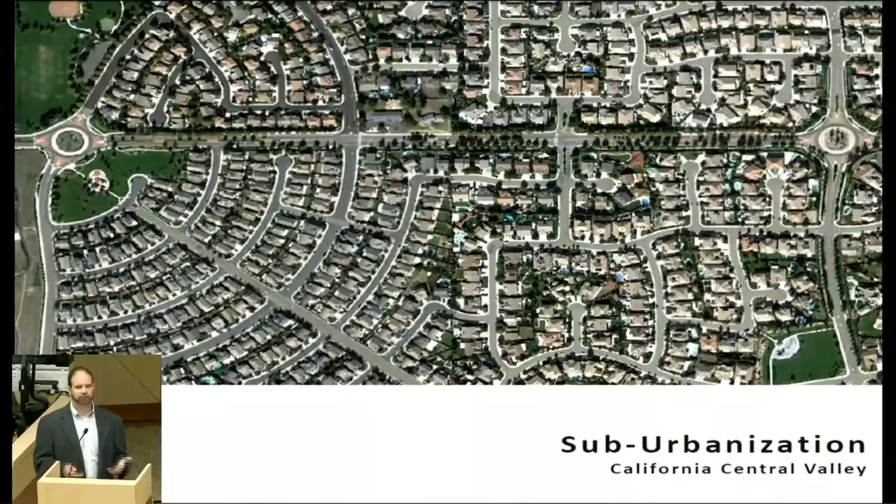A couple more examples, and it's not just here in the U.S. This is the condition everywhere across the world. The good news is that there's tons of different habitat out there. Let me back up and say that there's tons of different habitats, and the issue is that we are altering it. It doesn't matter what type of landscape it is, and we're replacing it with this condition.

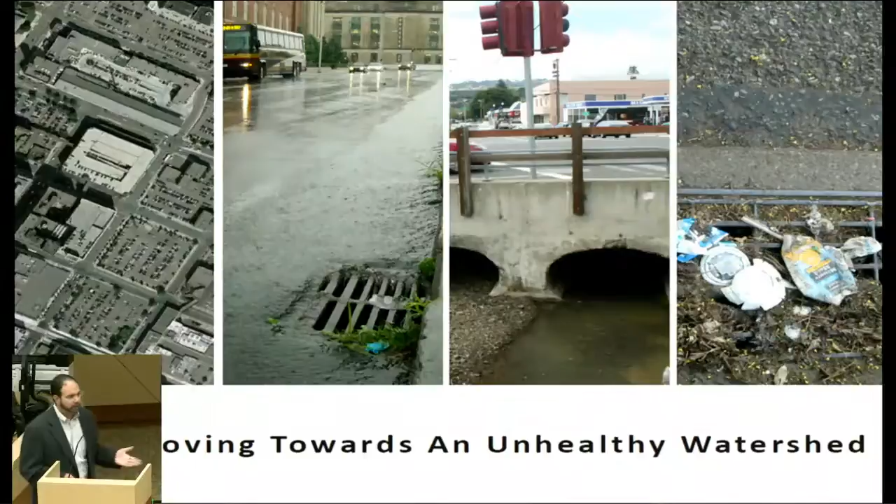The equation's pretty simple. Starting from the left to the right, we've got high areas of impervious area. When it does rain, none of that water can get into the ground. It's quickly conveyed into an underground pipe conveyance system, and it's kind of taken out of sight, out of mind. And of course, the trash and the sediment and the pollution load is taken with it.

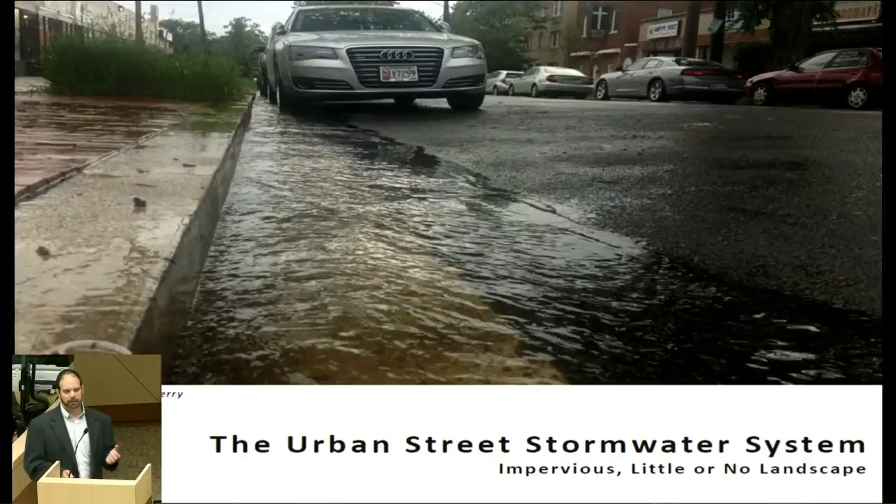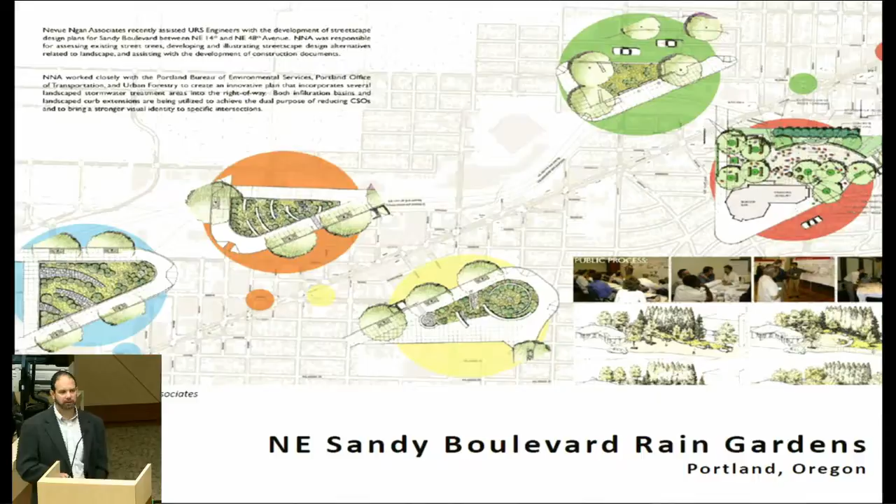This is another example of a different technology using rain gardens. This is Sandy Boulevard in Portland, Oregon, and for any of you that have ever been to Portland and driven or walked down Sandy Boulevard, it's a wide arterial street that cuts through the city grid.

What happens is that in many cases, as it's cutting through the grid, there's triangle spaces, these kind of leftover triangle spaces that were often just utilized as empty no man's land asphalt spaces. And they were too small to actually put a building on.

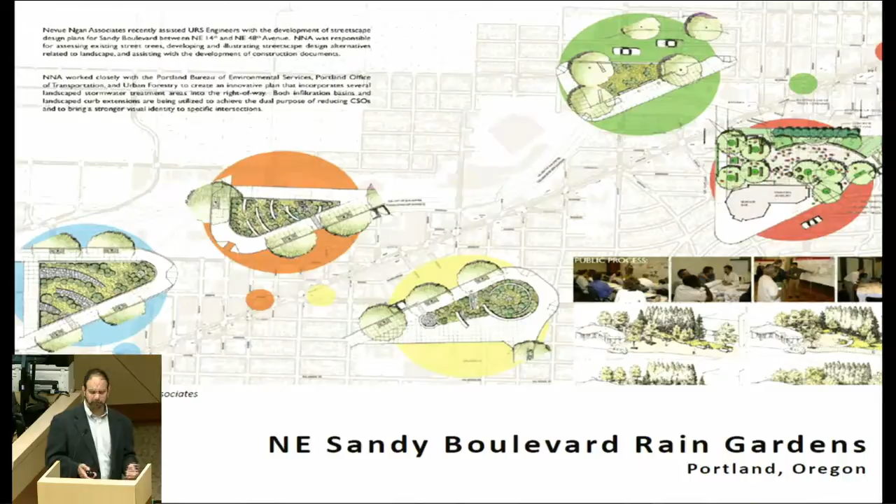So the condition pretty much looked like this, where you've got, again, this is Sandy Boulevard cutting through the grid, and this is a side street. These triangle spaces are a very inefficient use of space. It was very difficult for a pedestrian to actually get across these triangle spaces.

So we were asked to provide some examples as to how to fix this situation. We couldn't do it for the entire context of the street, but we did it at 5 locations where we converted some of these triangle spaces of asphalt into rain gardens.

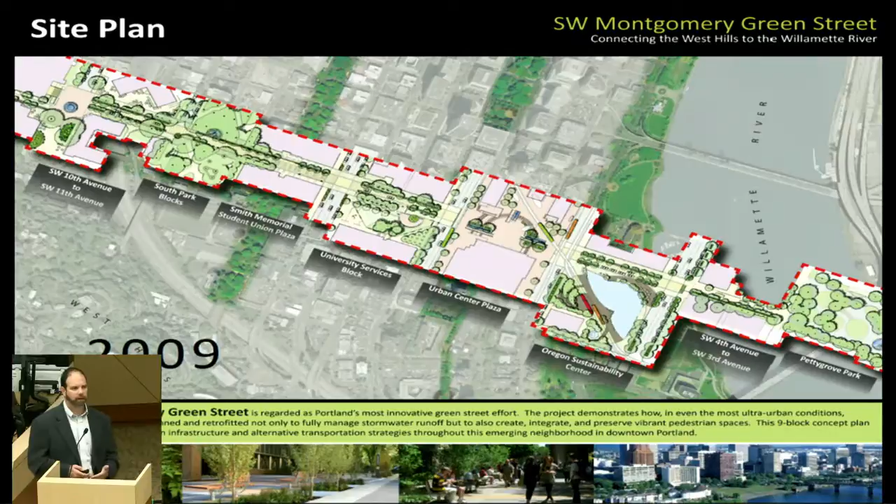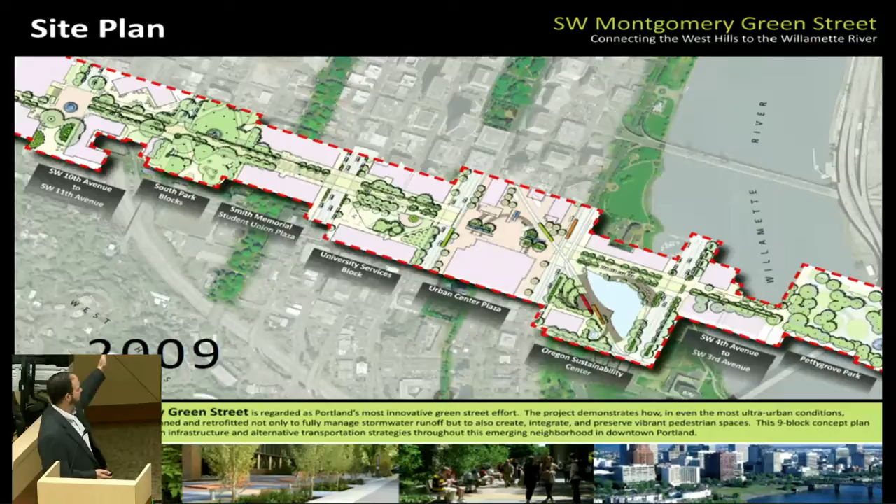This is in downtown Portland. This was a plan that I developed with many others in 2009 for Southwest Montgomery Green Street, very near Southwest 12th Avenue. The charge on this project was how green of a street we could really make Southwest Montgomery, in terms of not just stormwater, but how we could make it the best pedestrian space and the best bicycle space possible. It looked at about 9 blocks from the West Hills all the way down to the river, with specific focus through Portland State University.

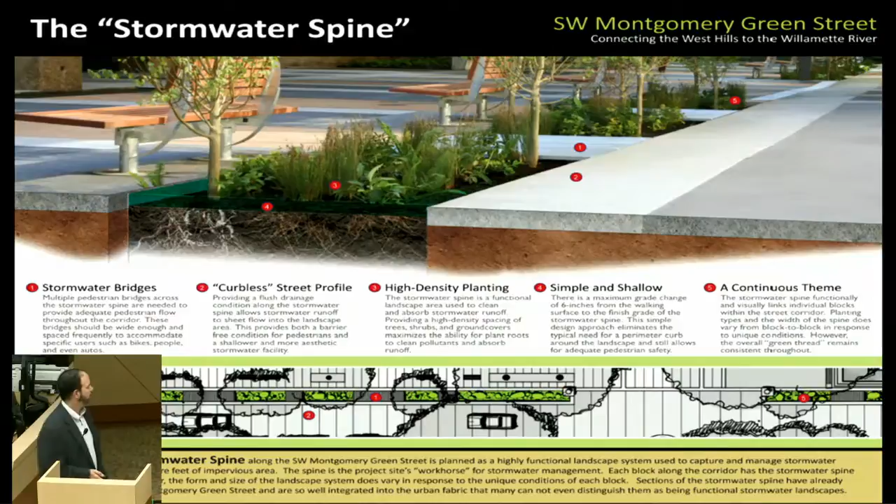What we introduced was something called a stormwater spine, a relatively continuous 5-foot wide planter that would go from street block to street block, with water just moving down the spine. Its design would change a little bit with the character of the street, but for the most part, it was one long, continuous green space.

Not just looking at the stormwater piece, but looking at how we can make this street better for all modes of transportation, whether it be light rail, increasing sidewalks from 12 feet wide to 17 feet wide to allow for better pedestrian space, many more bike racks, and more places to actually sit. And one of the blocks has its on-street parking all dedicated towards electrical vehicle charging stations.

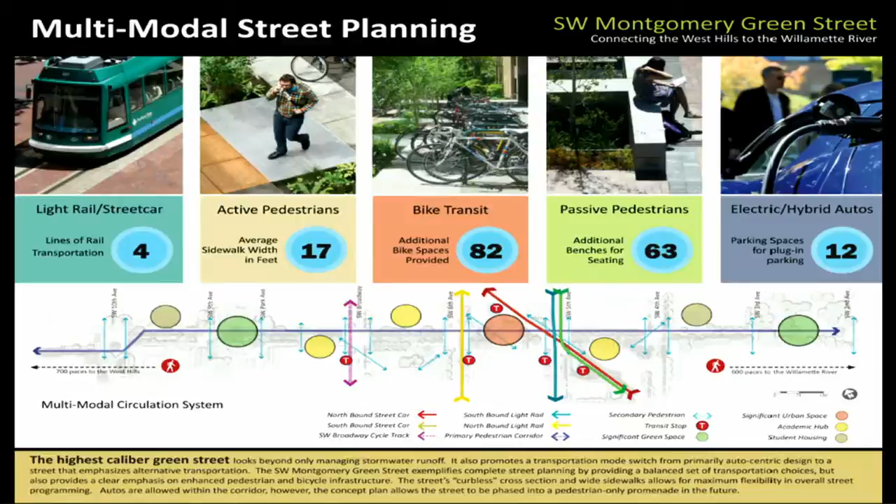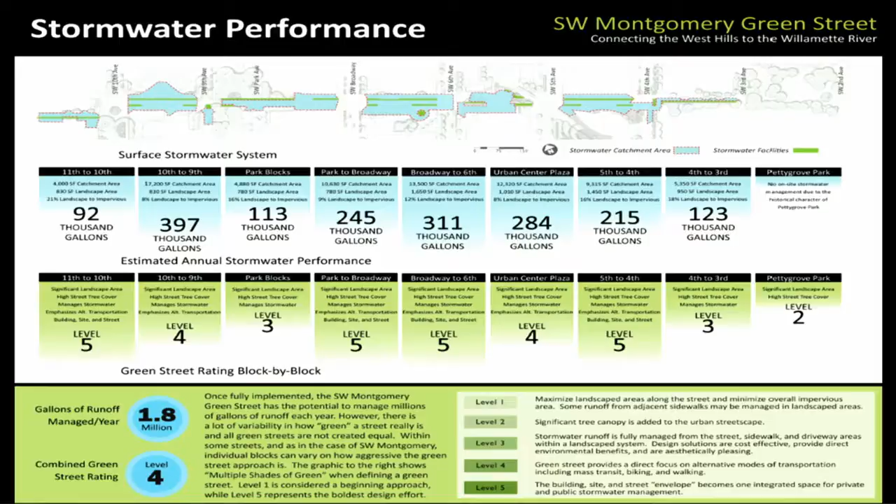This is still just in concept form. We did build 2 blocks out of this plan, but for the most part it's still just concept. We were able to understand how much water we can actually manage annually on this street if we do all the retrofit things we want to do, and it's just shy of about 2 million gallons of stormwater runoff per year.

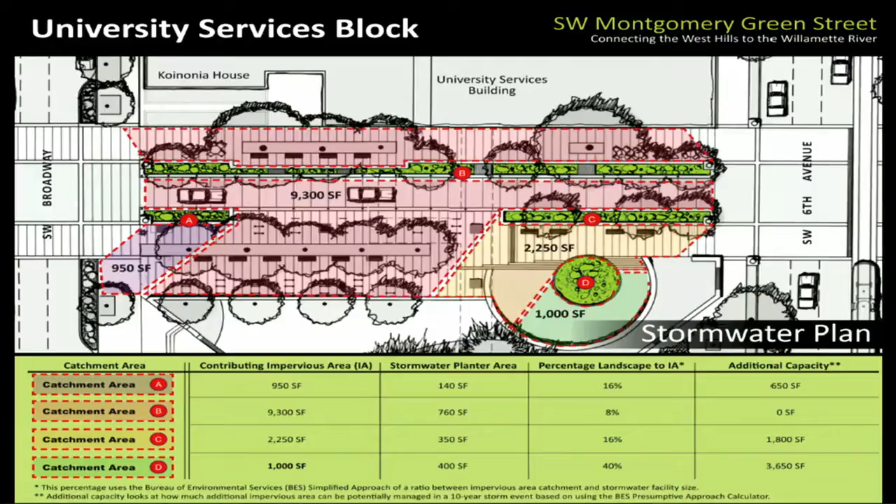One particular block is looking at a fairly bold retrofit of the space. Right now it's pretty much all impervious. This is how we carve up the different catchment areas of the street, looking at how the stormwater spine to the upper portion takes a good 9,300 square feet, but we have smaller chunks of landscape as well that can manage water. It's not just the stormwater spine, so how can we divide this up accordingly? We've only implemented 2 of the blocks, but we've done a pretty good job with it so far.

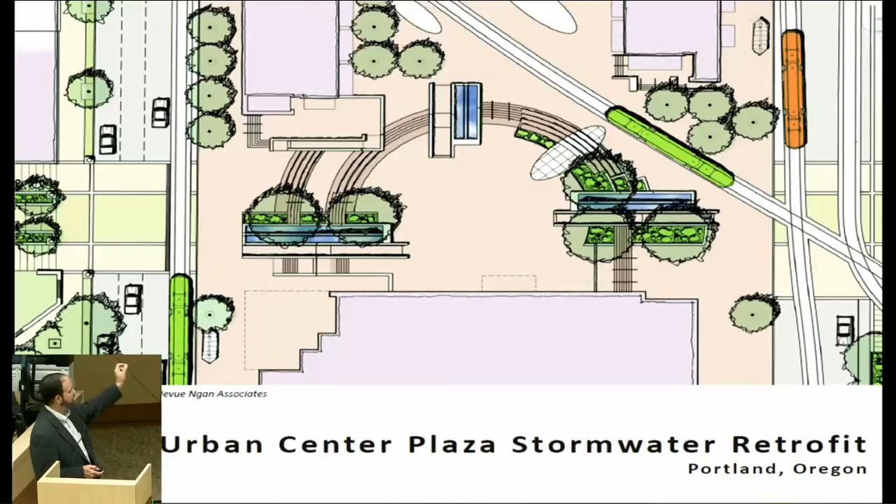So that was one block. The next block is just 2 blocks down from the previous one, and this is the Urban Center Plaza, 100% impervious with a series of fountains that were there. We wanted to surgically cut in landscape space that could manage stormwater without messing up the programming of the space, because there are graduations that happen here and a lot of pedestrian movement. So we had to be very, very strategic in how we carved in our landscape, and this is the concept plan, where there's a series of planters on the periphery of the plaza space.

There's so much landscape here compared to how much water is moving through the space that I rarely get an opportunity to see water moving down through the cascades, but it has happened quite a bit. It's just a good overall project that shows we can retrofit these types of situations in pretty much any context we want.

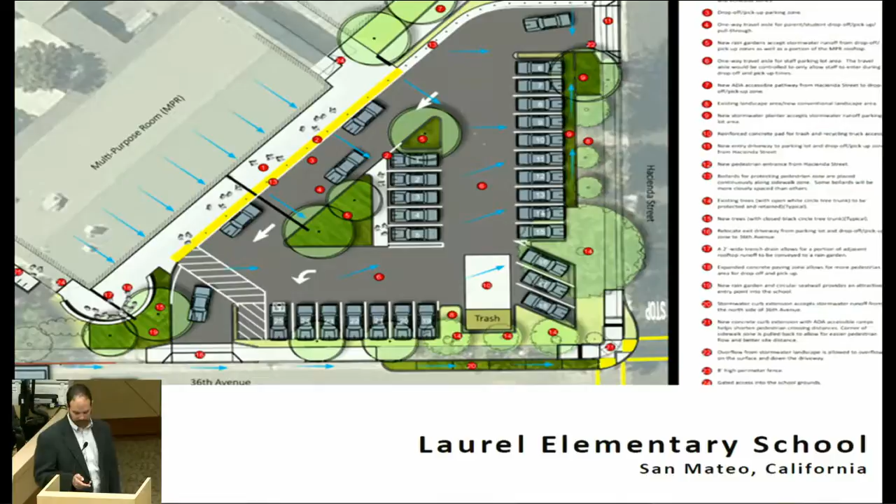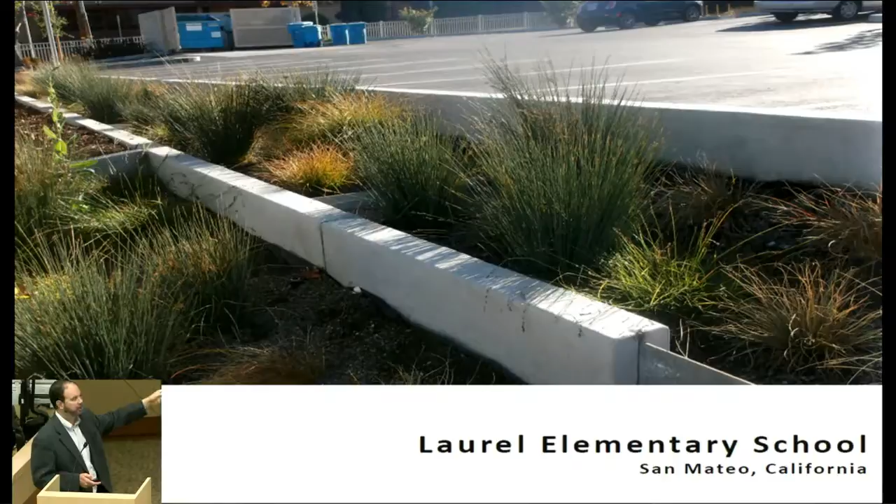Some pictures of this right after it was installed. This is kind of this terminus planter where there's quite a bit of management that's happened upstream. This is the most downstream area of management.

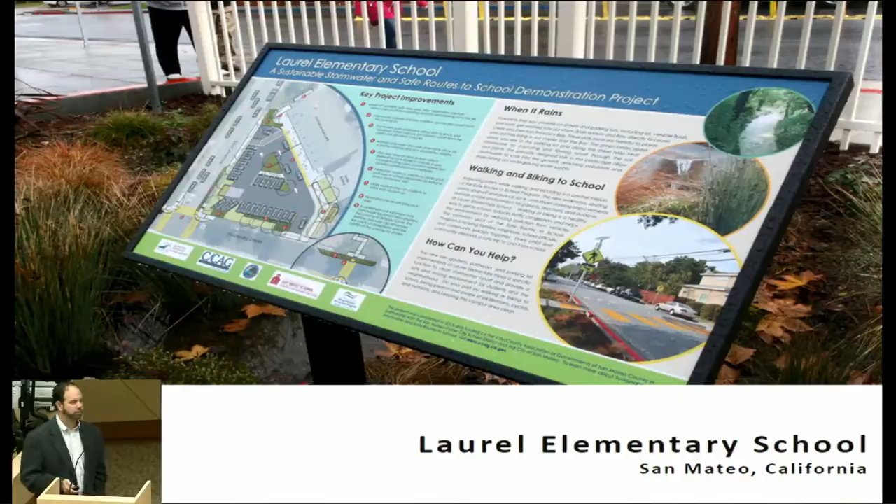Having a good interpretive sign is always important, especially on new projects like this. I've been out to this particular site numerous times, and when it does rain, it's quite beautiful to see the different colors of the plant material contrasting with the water.

That's kind of an overview of a lot of the projects. So some of my favorite projects - there's more, but I wanted to highlight some of those because they pick up on different technologies, whether it be a planter, a rain garden, a green gutter, stormwater curb extensions, a lot of different tools. What I wanted to talk about next was this concept of multiple shades of green, and it's pretty much relegated to the street environment, but I think it has wide-reaching applicability.

The idea is that when we're looking at the term green street, it doesn't have to be a street that is just full of bells and whistles in terms of how much water we're managing.

There are multiple shades of green, and it's important to talk about these different levels, with level 1 being the least green, but still important, and level 5 being what we might call the most green. Level 1 is simply saying that in our urban environment, let's try to get more landscape in the ground. It doesn't have to actively accept stormwater in a swale or a planter or a rain garden, but just putting in more landscape when we can.

There's plenty of opportunity to do exactly that. Level 2 builds on that approach, but if we have more landscape, we're actively trying to get more tree canopy into the mix, slowly building up the level of green. Level 3 does everything with level 1 and 2, but then allows that new landscape to actually take the water, to accept it in the form of a swale or rain garden.

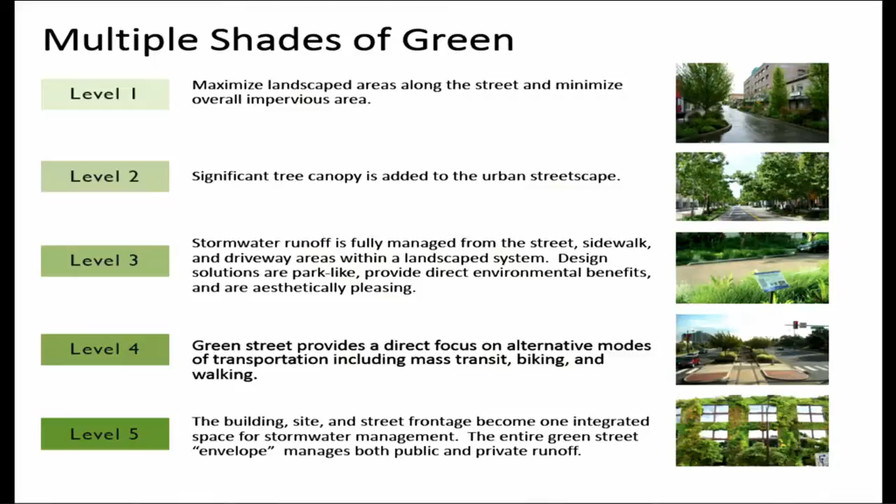Taking water from the building and putting it out into the right-of-way, or vice versa, allowing the right-of-way water to move into the private realm, there's not this separation between public and private. We just have landscape space, and it's managing water accordingly.

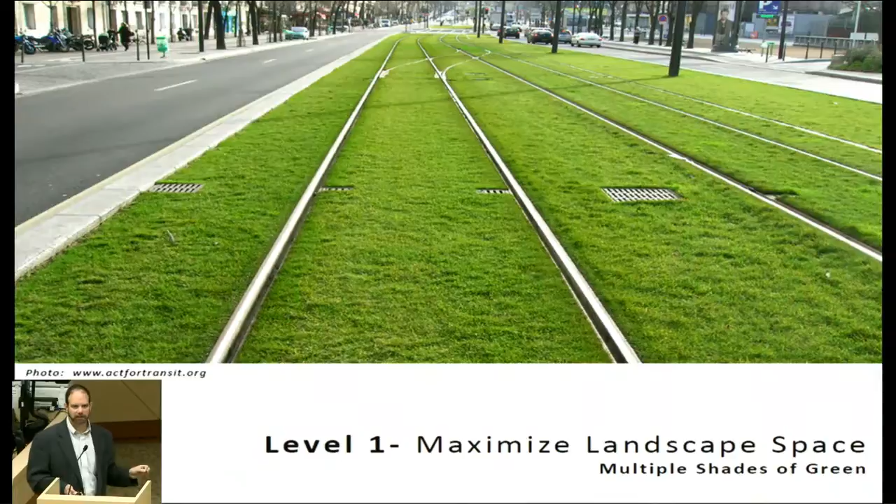This could have just as easily been paved, and while I don't necessarily approve of it being all lush turf grass, but this is in Barcelona. If this was planted in a different situation, this is the idea of where we need the paving, let's have the paving. If we don't need it, let's take it out and put in landscape space. It's only going to do better things for our urban environment.

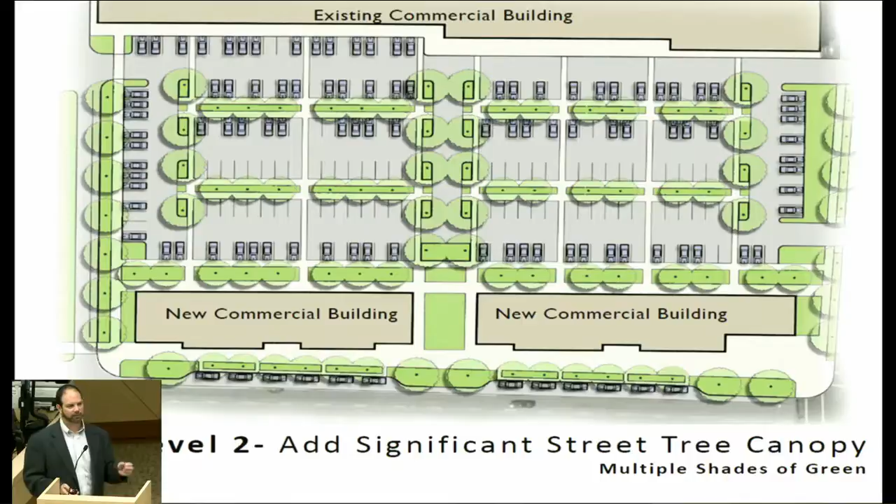What about those strip malls that are gracing many of our arterial streets? I had fun with this one. This is just an example in San Mateo County of a strip mall that I took the liberty of altering the parking lot code, putting in the exact same amount of parked cars represented here with more capacity, but look at the amount of landscape space I was able to yield just by going through a design exercise. In fact, so much space that we could actually infill new buildings into the mix.

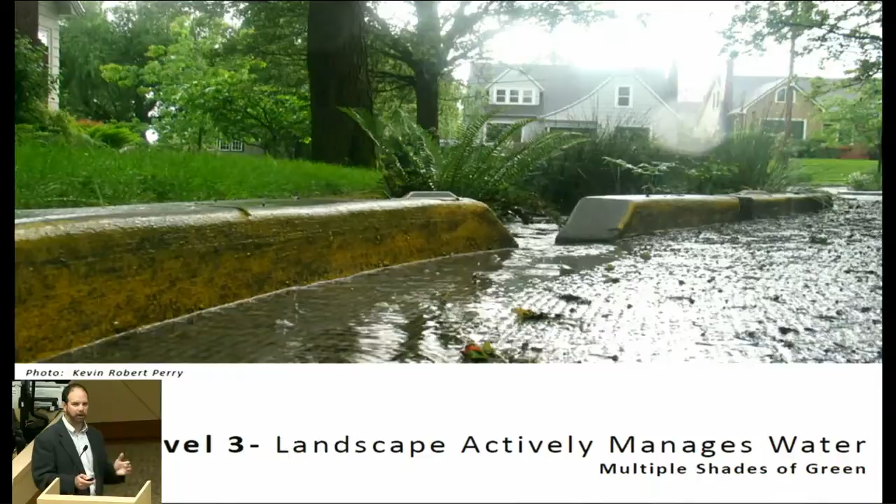Now level 3 is what we described earlier with a lot of the retrofit projects. It's just actively managing water. So we've seen projects like this, 12th Avenue, Mount Tabor.

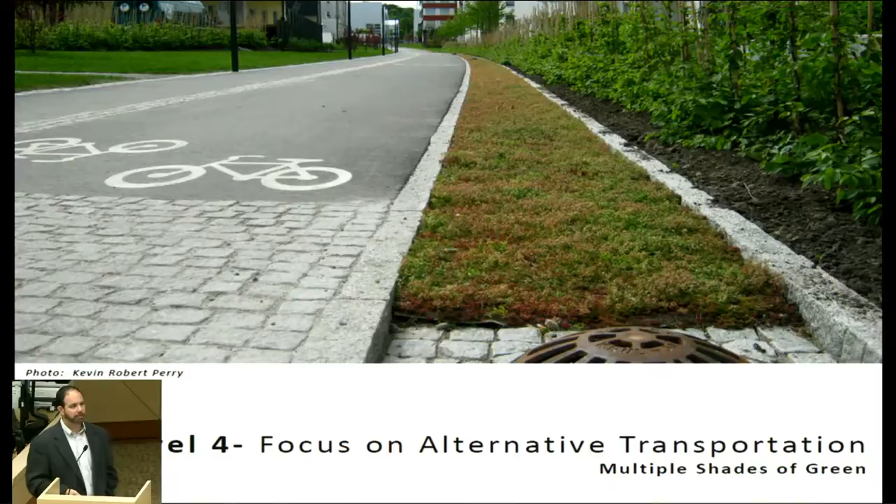But the level 4 Green Street is one that's doing everything we can do with stormwater, but also utilizing a better role for alternative transportation. This is a great picture of a development in Stockholm, Sweden, and this is a green gutter, actually, planted with sedum. The water is moving through this multi-use bike path / pedestrian path into the green gutter.

Here's an example of a residential street where the bike infrastructure is there, it just needs some more greening. So if we were to do something like this, we're taking away that parking zone that's not utilized at all, wasted space, get rid of it. Emphasize the bike lane, emphasize the pedestrian realm, and then have this green condition that exists there.

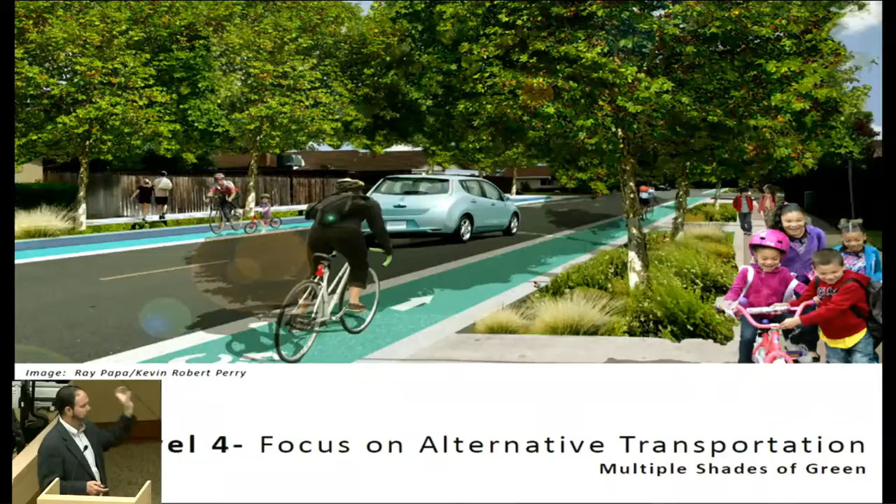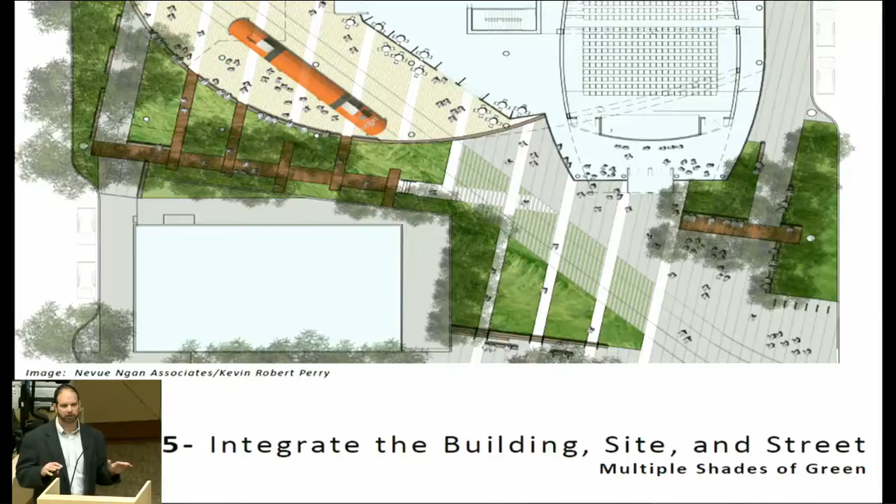And we wanted to incorporate the idea of a level 5 Green Street, which suggests there's no separation between the public water and the private water. Water from the building could go into the street right-of-way, and vice versa. The right-of-way water can be moved into the landscape system. By doing that, it just combines the efficiency of the landscape to manage water from whatever source is nearby. This is kind of an idea of what it could have looked like. Ultimately, it actually wasn't able to go past the concept phase.

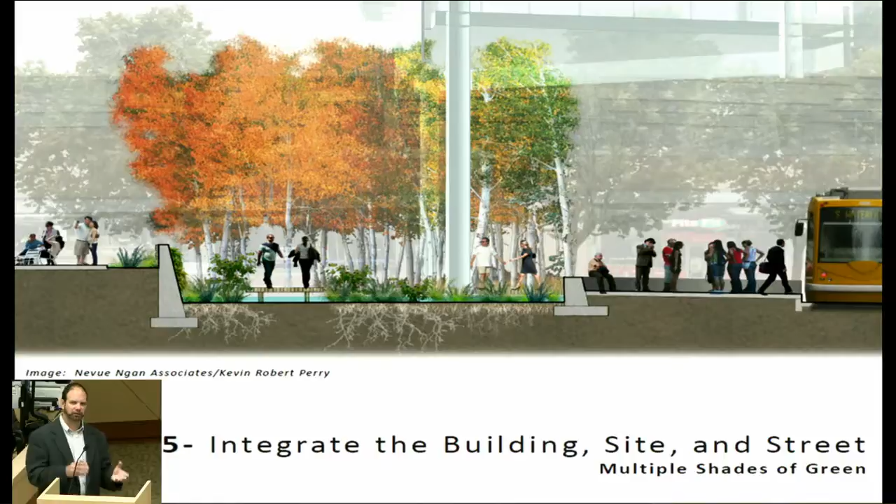But there's very strong reasoning as to why we shouldn't allow that separation between the public and private realm be a limiting factor with managing stormwater. There's so much space out there if we're able to combine landscape resources to make that happen.

Moving through these different concepts, multiple shades of green, I want to talk about microgreening. This is one I've been quite interested in for the last couple years: the idea that we're managing water at such a big level. I remember back in high school we were asked to problem solve by working backwards, working tiny, working big.

So this is an example of taking a larger problem of stormwater management and focusing really tight, thinking about managing water almost from the droplet level, and allowing that to inform bigger ideas. I look at the urban landscape as a design model. There are examples where the urban environment is actually breaking down—the paved infrastructure is breaking down, and we have a lot of cracks in the pavement. Some are formalized, like a score line between two pieces of pavement, where there's just enough ground contact within the crack system that it can manage water. I was surprised at exactly how much water could be managed.

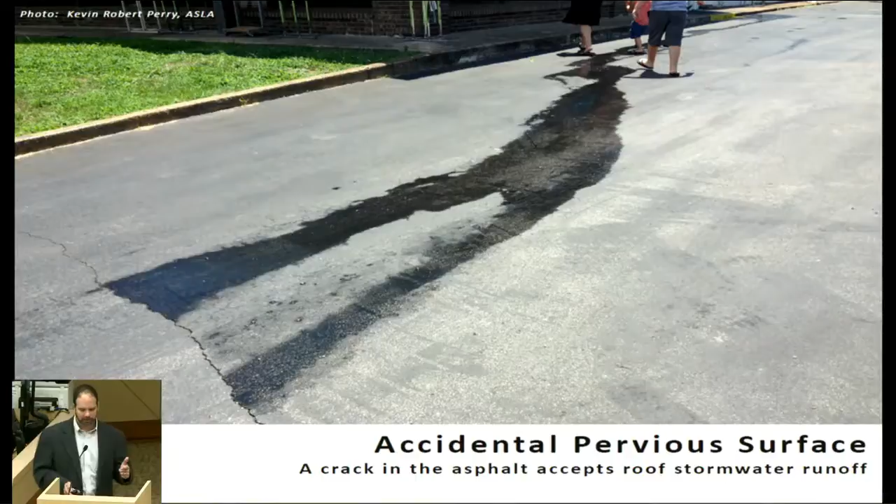This light bulb went off in my head when I was visiting my family in Nashville, Tennessee, a couple years ago. A big thunderstorm went through on a hot summer day, and afterward there was a lot of evaporation. But there was a building downspout that kept bleeding water into a parking lot, and there was a crack in the parking lot. I watched this water go right into the ground—an amazing amount of water kept going for a long time, managed within a really small amount of space. It got me thinking there might be a role for this type of microgreening, or water crack technology, I need a better term, but this is an amazing thing to have happen, and it's largely accidental.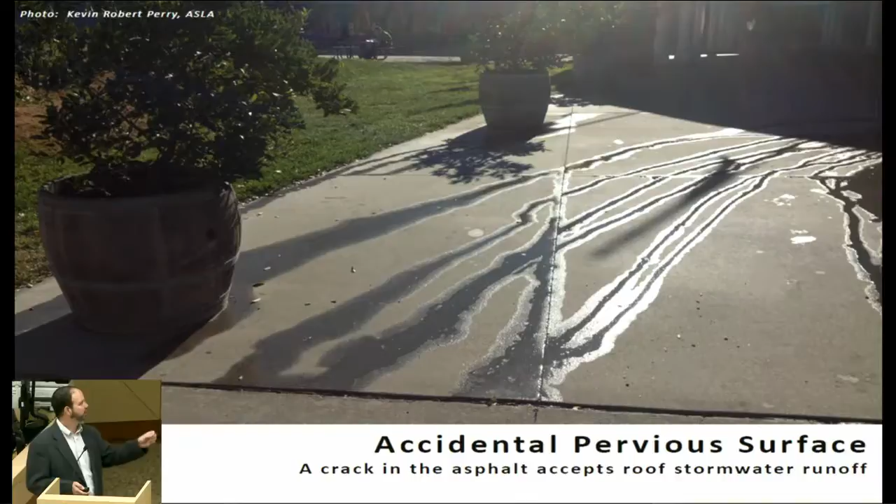Another example is over at UC Davis where I teach—water that was over-irrigated from some above-ground planters moved through the sidewalk zone and hit an expansion joint that had contact with the ground, and again that water moved right into the ground. So I started taking pictures—I hate to say it, I've got probably 300 pictures of cracks and landscape moving through cracks.

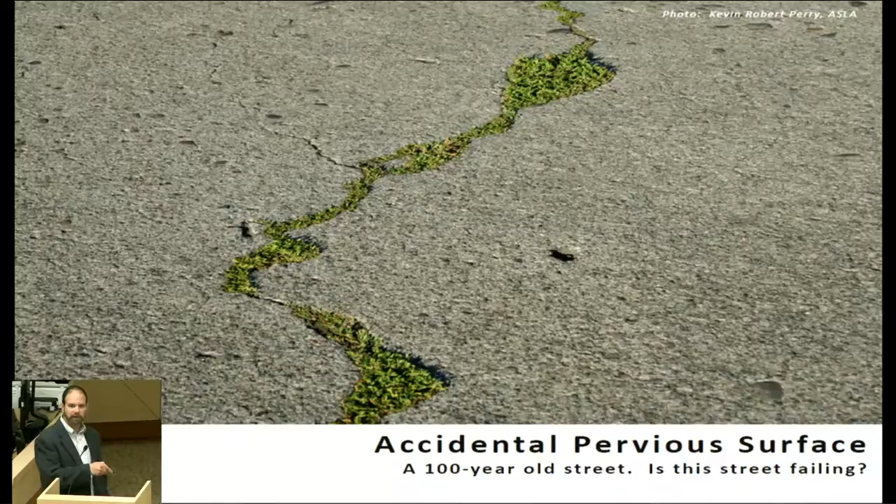This is an example in Portland, on my street—a 90, or actually 100-year-old street. Landscape is moving into this street environment, and it's beautiful, like green veins moving all through the street. It's pretty much accidental pervious paving, but it does it in such a beautiful way. It doesn't have to be this irregular look—it can be more formalized.

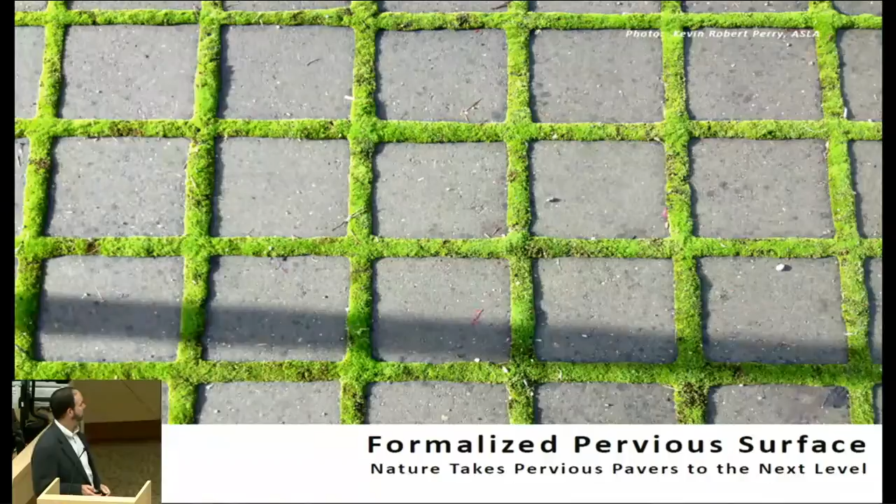This is a design example in Barcelona where this could have been paved from the building face all the way to the street, but the sidewalk zone is maintained for a certain distance, continuous, and then these half-landscape, half-pavement areas are introduced where pedestrian travel isn't as robust. Really nice example.

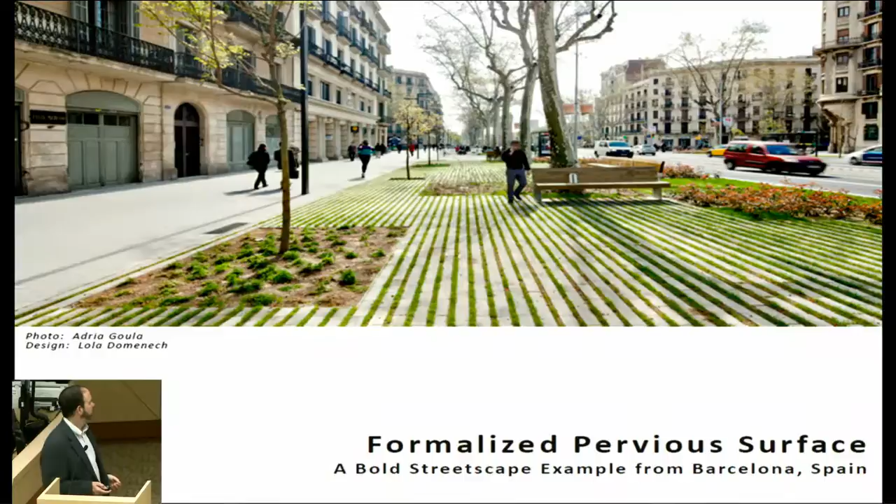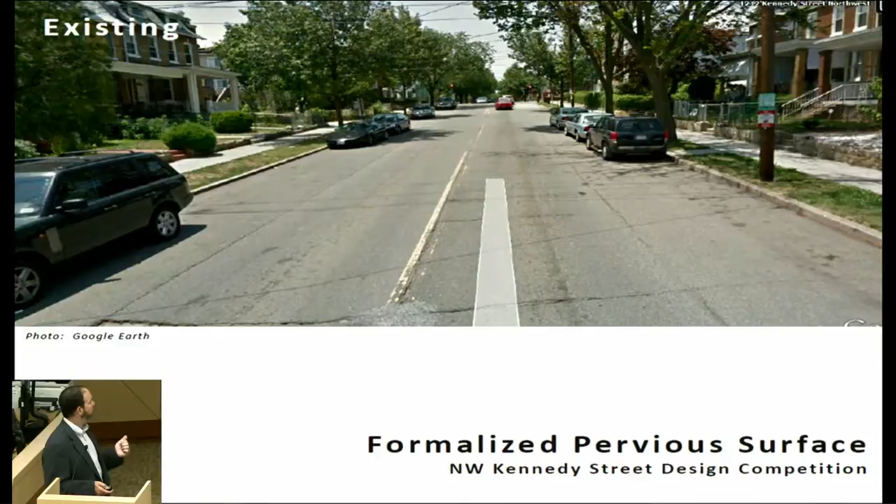I look at these types of projects and try to think about where that's applicable here in the United States. We're actually looking at doing something similar at a street project in Washington, D.C. This is a residential street, taking the parking zone of the street and introducing formal lines of landscape that allow water to move into the ground.

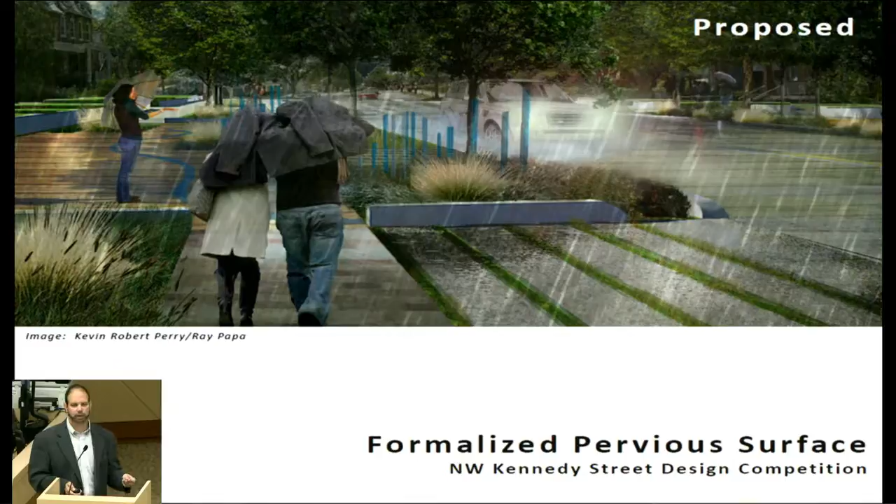I want to further this experimentation, not just with streets, but maybe parking lots as well. Where can we cut in these areas of landscape to make water management happen on the micro level?

The last thing I wanted to talk about was this idea of starting small and thinking big, similar to the idea of micro greening, but with actual projects. I wanted to highlight this particular project at UC Davis that I implemented with my students, not last year, but the year before. It's a retrofit on the UC Davis campus along California Avenue.

The project had several goals. We wanted to look at retrofitting an existing lawn space that could reduce irrigation, manage stormwater runoff, provide valuable hands-on learning for landscape architecture students in the program, and demonstrate simple, cost-effective ways to implement green infrastructure, because that's on everybody's mind. How can we make this happen in a very effective, cost-effective way?

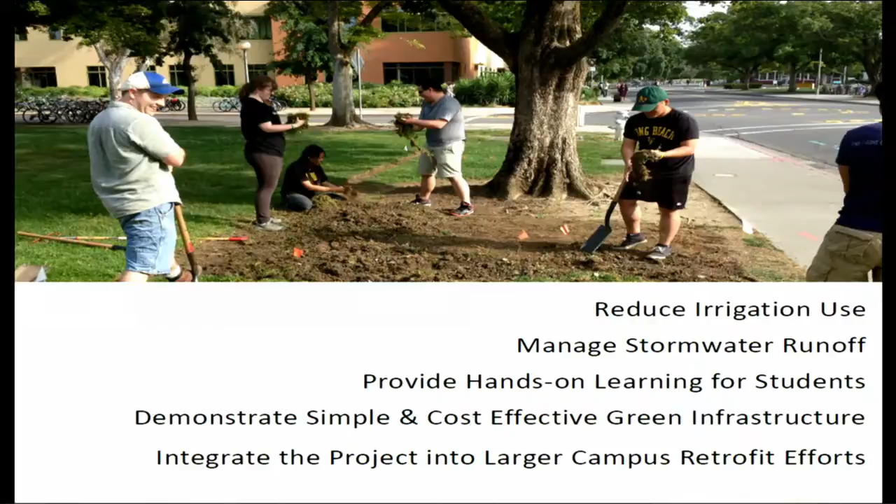When I think about starting small and thinking big, I want to integrate the project into the larger campus retrofit effort. This project is right in the heart of the Davis campus. This is what the streetscape looked like before—all irrigated lawn up to the back of the sidewalk.

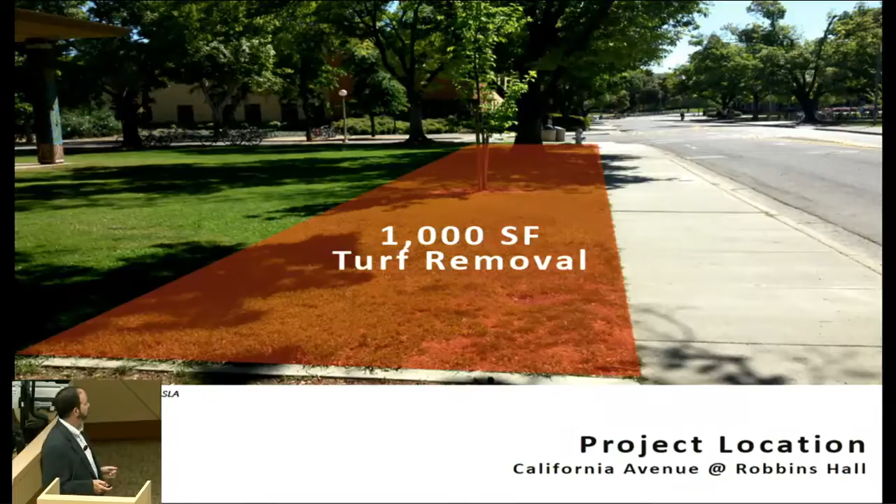Our idea was to remove about 1,000 square feet of this lawn space. By doing so, we'd reduce the overall irrigation load on the campus a bit, but also introduce a rain garden in between two existing mature trees.

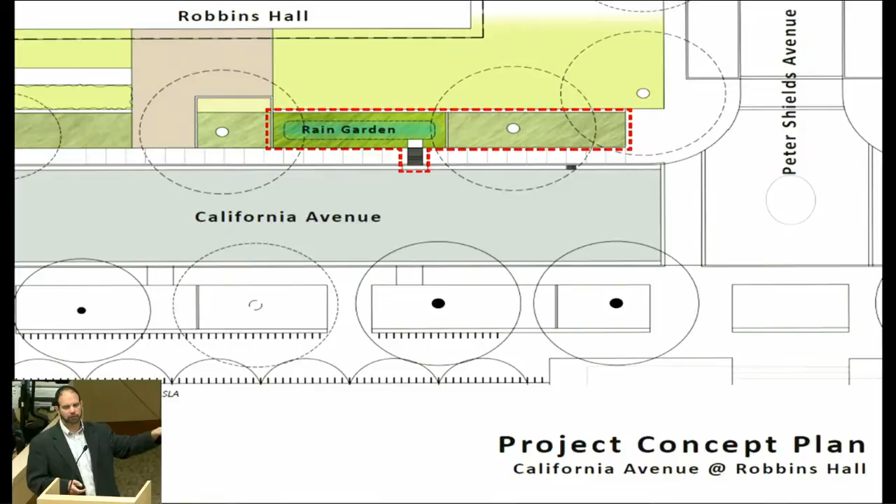This is a simplistic plan view of this space. There's California Avenue, and Robbins Hall is the building it fronts. The idea is to intercept water as it moves from left to right via a trench drain that allows the water to move underneath the sidewalk zone and into a rain garden on the back side.

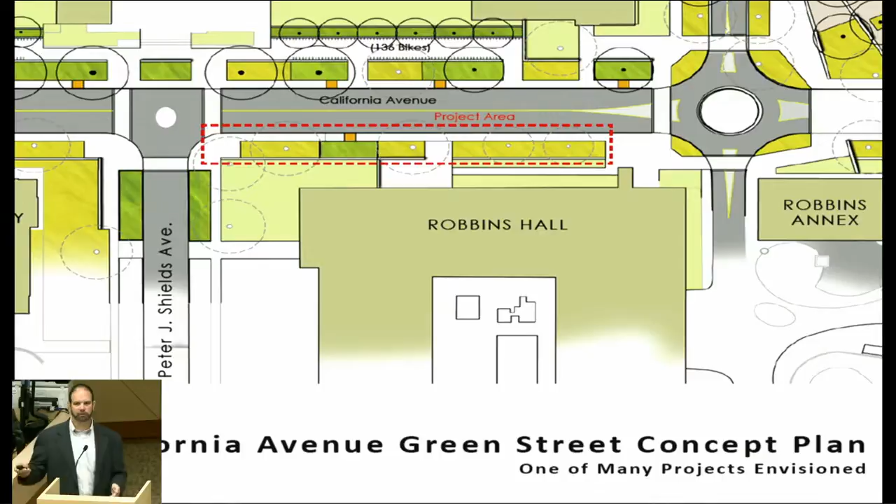What you don't know is that this project is part of a larger effort along California Avenue to retrofit the entire street from Hutchinson Boulevard to Russell Boulevard within the campus. This is an actual plan view of the graphic I produced a couple years ago for the campus that shows the retrofit of California Avenue.

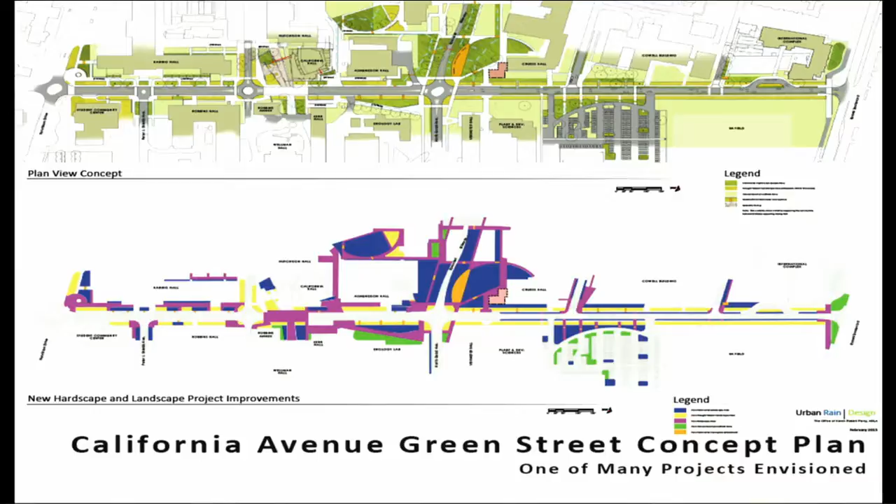It's not just the street—it looks a little beyond California Avenue as well. Everything you see there in that dark blue and purple is all stormwater-related landscape that would be retrofitted into the mix. But this is just a small effort that myself and the students wanted to take on to help inform that overall plan.

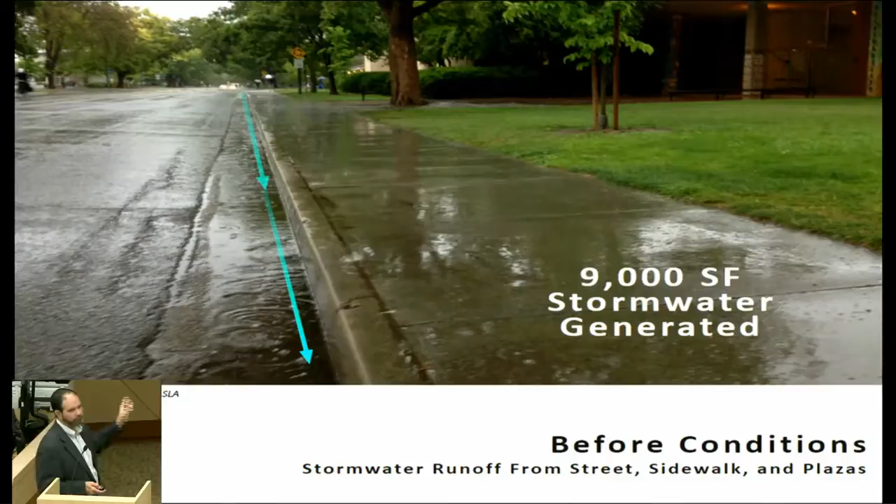So this is the before condition: thirsty lawn, very little plant diversity. And when it does rain, a lot of water comes down this street—about 9,000 square feet of water is generated.

Right about where the 9,000 square feet text is, we're going to cut that concrete out and allow the water to move into the space. If we didn't, all that water would move into the existing storm drain system. So we want to try to intercept that before it even happens.

This was the beginning date, April 28th, 2015. We decided how far out we wanted to remove the lawn, which was kind of a function of the existing irrigation system—where the heads were and where we could alter the irrigation. Then the fun part: removing the lawn.

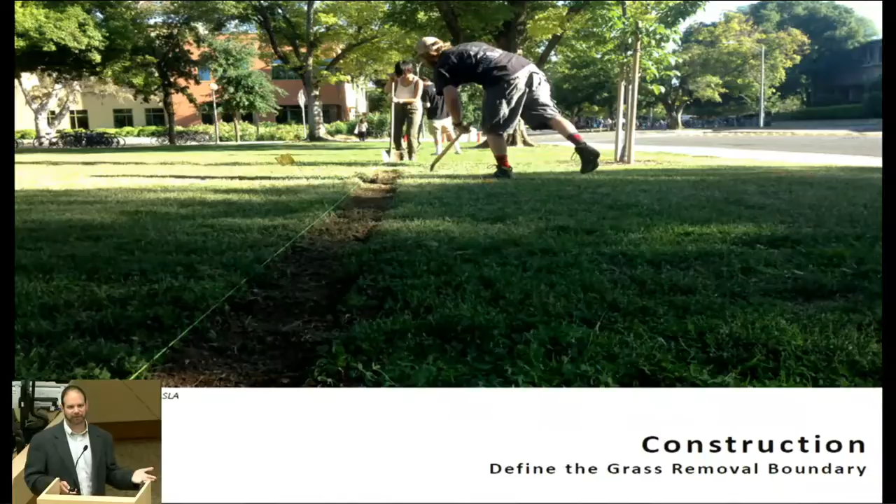We did this all by hand—mostly all by hand. I was out there for a little bit, but these guys worked really, really hard. It was a handful, maybe 12 students, day after day, chunk after chunk of lawn removed by hand.

We tried to save the smaller existing tree—it was at ground level, but we had to recess the grade for the rain garden to exist. We tried to pop the tree out and put it back in, but it was in too high, and unfortunately we lost the tree. We plan on replanting it.

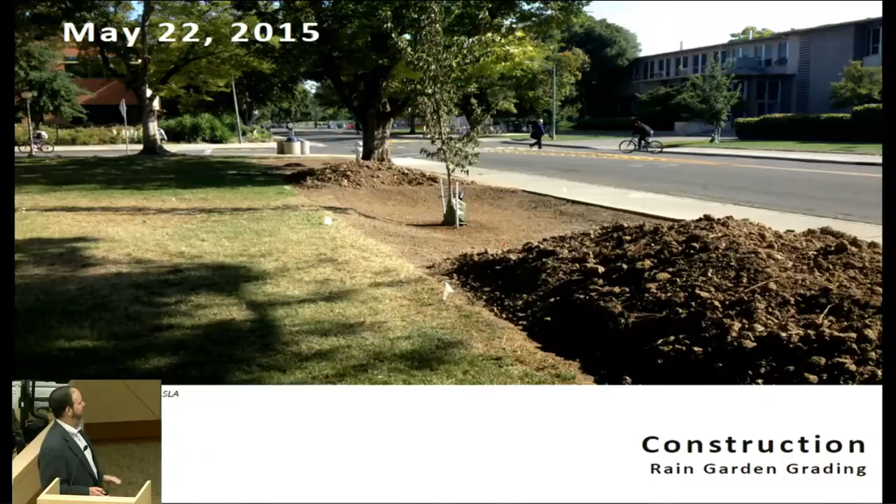All the dirt you see here was removed just by hand shovels, and these are the students grading the rain garden. What you see here is a template I gave them, made of foam core, with an exact 4-to-1 slope for the side slope, and they would scrape that grade along to achieve the right grade I wanted.

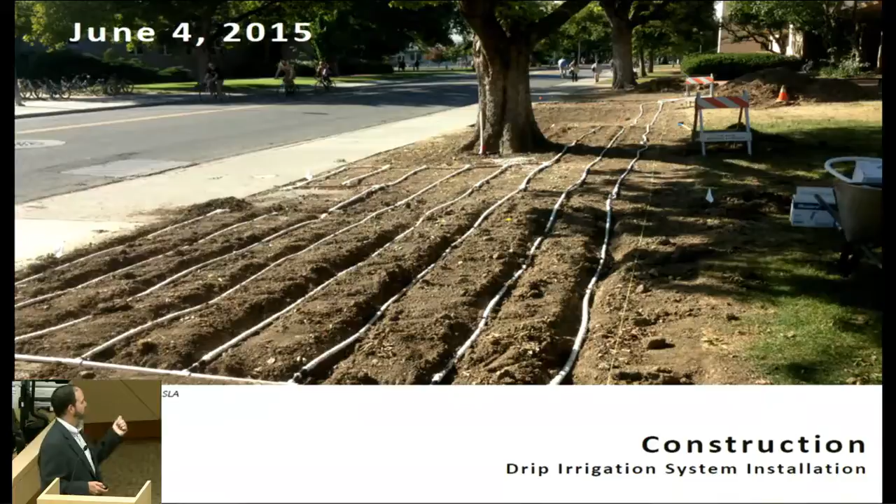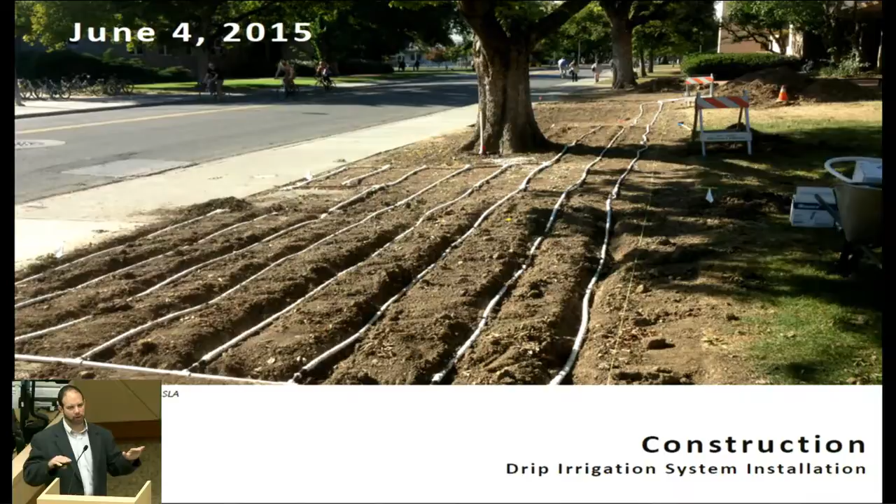And then switching out the irrigation system from a spray system to a more efficient drip system. This is a different product by Hunter that wraps the drip pipe with a fabric that helps wick the water away from the actual drip holes, giving more even distribution between the drip emitters rather than allowing that water to move straight into the ground.

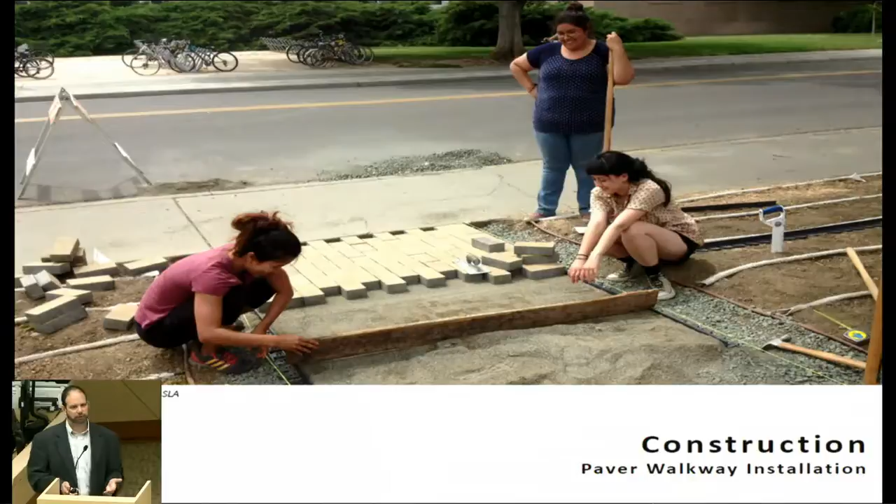So interesting, and it's working pretty well. We're laying out the drip lines—nothing that precise. And then we wanted the students to insert a paver pathway as part of their construction experience, so they're doing exactly that.

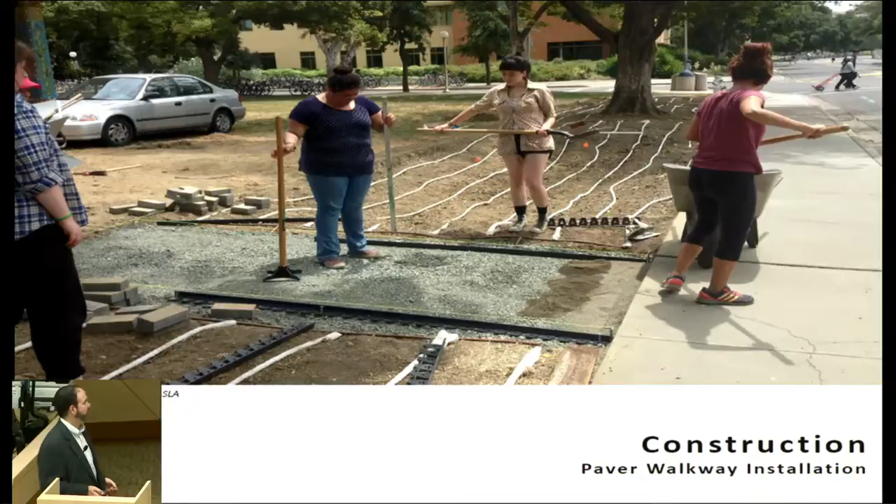A lot of these students have never worked in construction before. It was a great opportunity for them to be out in the field. Granted, it was some really hot days, but this is where the paver system's in place.

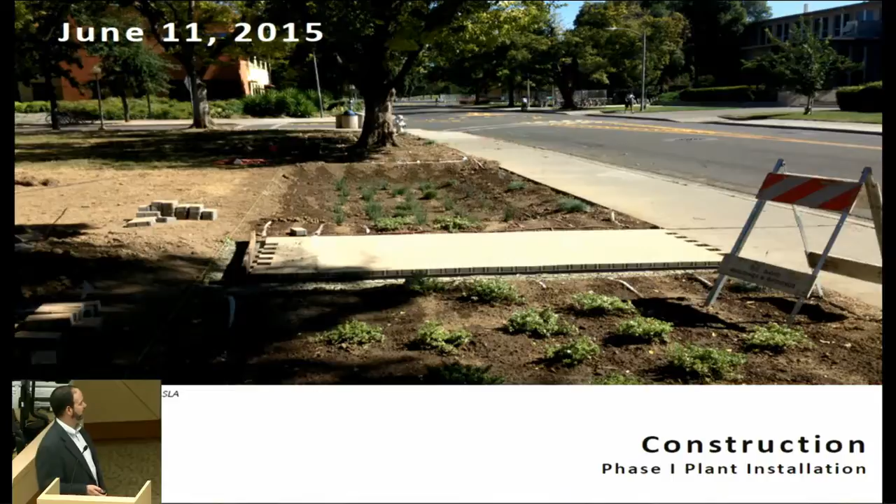This is planting day. Take into account we're planting in not a great time of year, June 2015. We didn't get into the major heat yet, but we were scared about the plant material—we were really relying on our drip irrigation system. We put down some mulch, and take note, the rain garden has been mulched with pea gravel rather than a floatable organic mulch material.

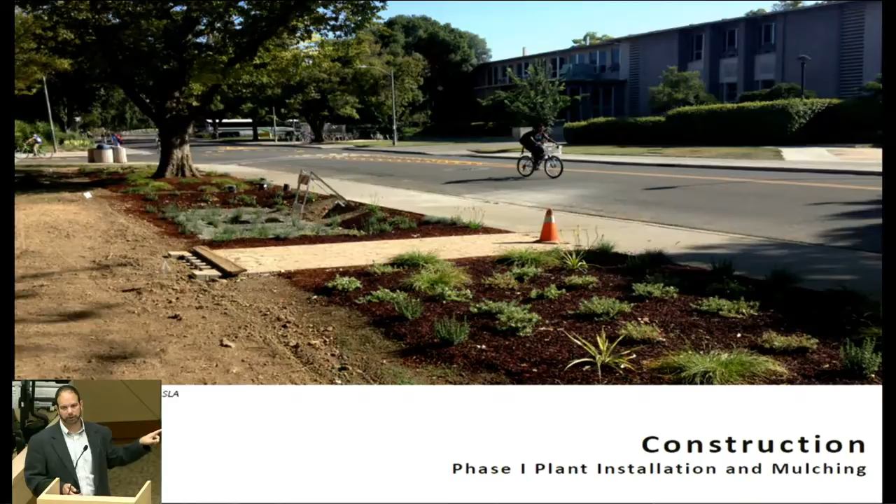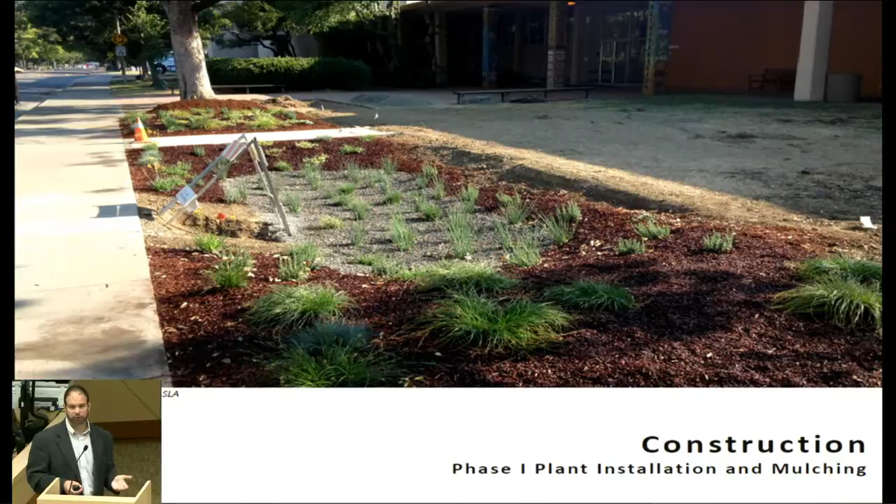The reason is when we have a situation where we're taking a large amount of water into a rain garden, mulch material will float up and has potential for clogging. I use pea gravel as a pretty effective mulch—about 2 inches thick. It retains the moisture and it doesn't float.

So this is what it looked like when we ended the planting in June. And we came back in November and we didn't lose that much plant material—I think we lost maybe 1 or 2 plants.

But what was the missing piece? We still hadn't cut the curb to allow the stormwater to move into the landscape space. That was a task that went beyond the skill set of the students, so the UCD campus grounds crew actually helped us out with that.

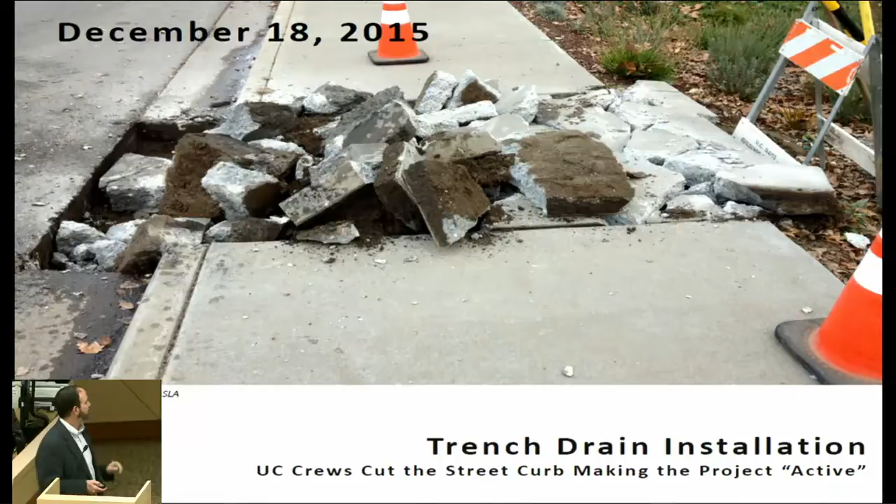Okay, so December 2015, everybody's on holiday break. We cut the curb for the trench drain to move through, but we got some rain—some storms moved in, and so it interrupted our construction quite a bit. So this facility was live, even though we didn't have an actual trench drain. Water's moving in, and I was happy to know that the water infiltrated really, really well.

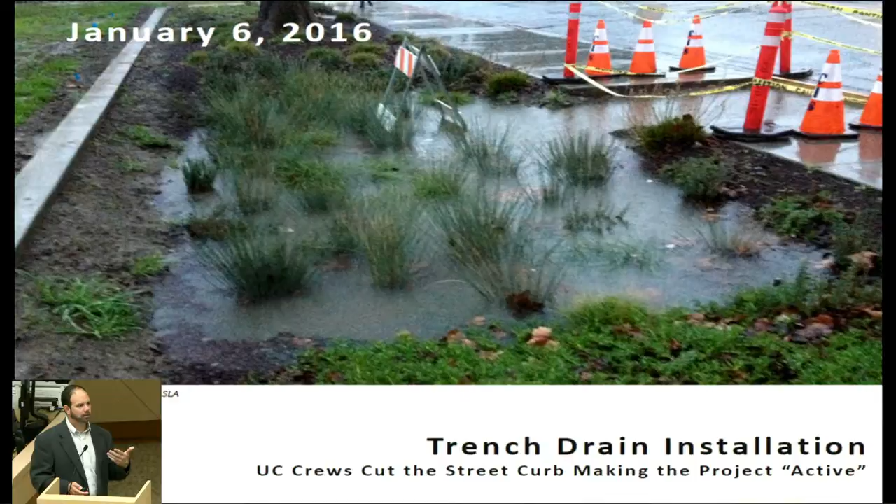And again, keep in mind, this is a simple rain garden. There wasn't any soil amendment at all—we were working just with the native soil that was there. And so it was a really good project.

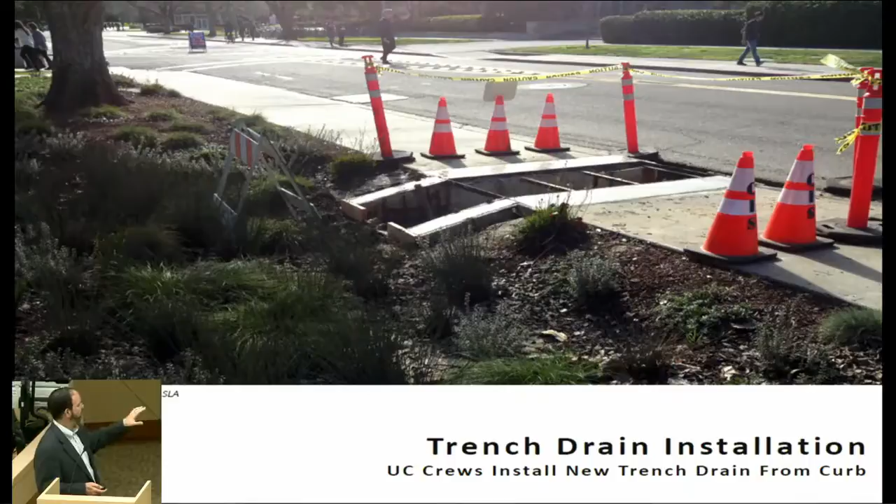So now things dried out a little bit, we can have the trench drain installed. It's installed now, this is in February. Now we have a true kind of finished product where the water is moving down the street and there's a 3-foot wide curb cut, relatively ample. A lot of times the curb cuts are relatively small, 1 foot. I like to make them as big as possible and make sure that water is getting into the space.

I should also note that this is a very unique situation where there is no real outflow—the inflow is the outflow. So what happens is that when the water moves into the rain garden, it fills up to a depth of about 6 inches. It has nowhere else to go, so the water can't get in—it just bypasses along the face of the curb. And whatever water we can't get in will just continue to move through.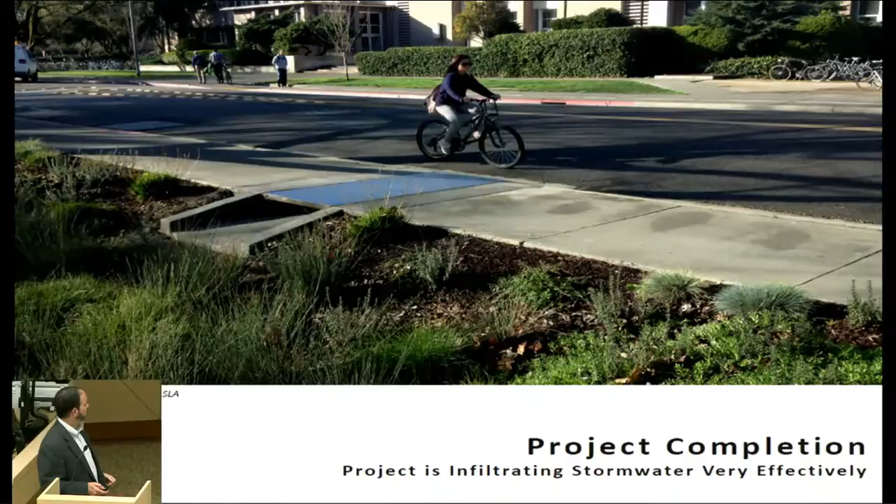Again, in wintertime. But after a couple months, we started getting some blooms and the plant material is growing up. This is right before UC Davis' famous picnic day in April. I'd taken these pictures of the rain garden—so this is what it looked like before, and this is what it looked like this year for picnic day in April.

We completed the project. I'd say, by the time groundbreaking to completion, it took a year, which is a little bit more than one would want, but a really good project.

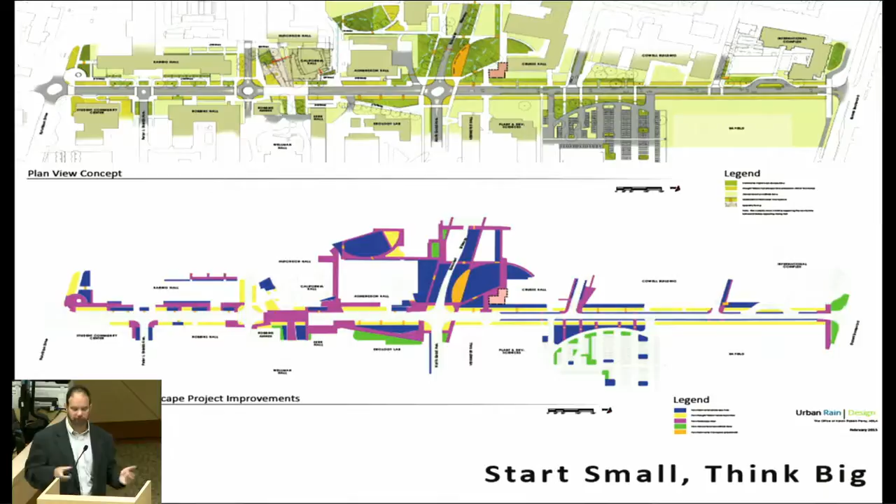And again, this was just one little piece of the puzzle that the students helped implement that will inform this larger picture for the UC Davis campus. So with that, we went through a lot of different topics and 173 slides.

I hope this was helpful to visualize and provide some inspiration of what we can do to help retrofit the urban environment with green infrastructure. Thank you.